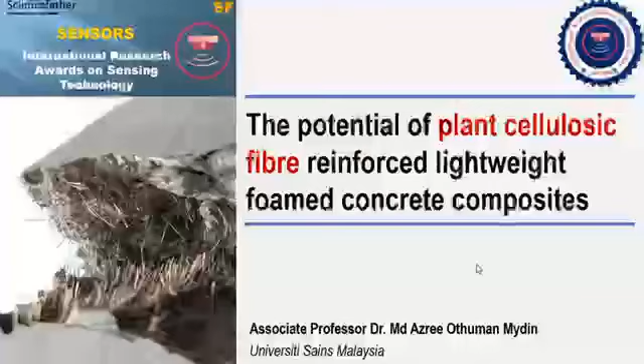My presentation, or to be more precise, a sharing session for today, will cover the following components: a little background of the study, some reviews conducted from previous research, the methodology, the main findings, discussion, and last but not least, the conclusion.

Now I would like to share a bit about the background of the construction industry all over the world. As you are aware, the construction industry consumes huge volumes of non-renewable materials. This not only causes the wastage of minerals in millions of tons, but also emissions of carbon dioxide, which pollutes the environment. In the early era, people used renewable resources to construct their homes and buildings. The use of renewable resources plays a vital role in eco-friendly infrastructure development in human society. Therefore, the construction industry is focusing on sustainable materials and techniques nowadays. The utilization of renewable resources in construction represents a major contribution to eco-friendly and sustainable development.

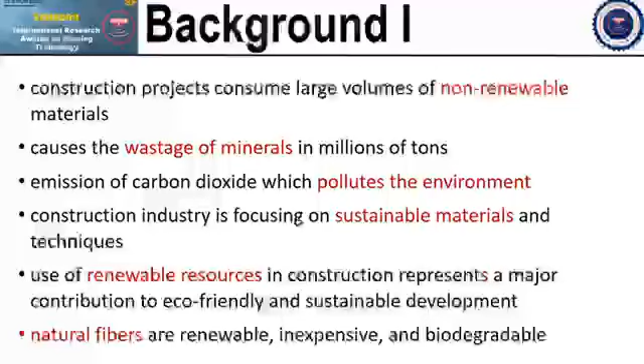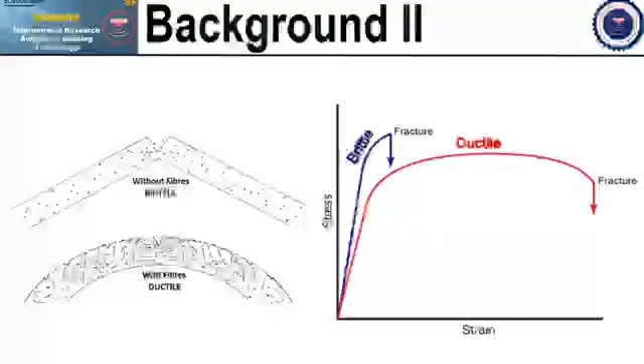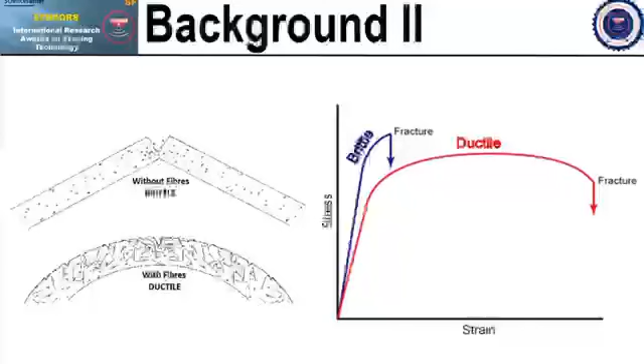As you know, concrete is brittle in nature and exhibits relatively lower tensile strength, limited ductility, and limited resistance to cracking, as you can see on the slides on your left. The micro cracks exist inside the structure of concrete and result in poor tension strength because of crack propagation with time, leading to brittle fractures.

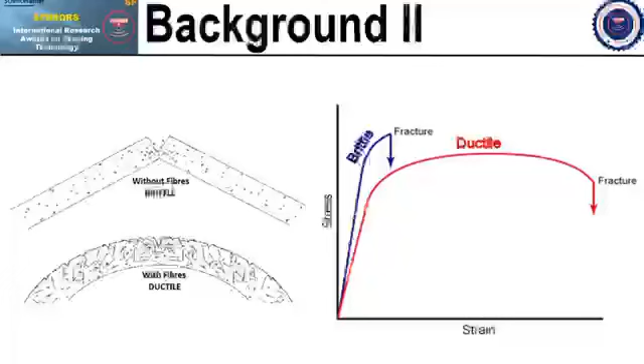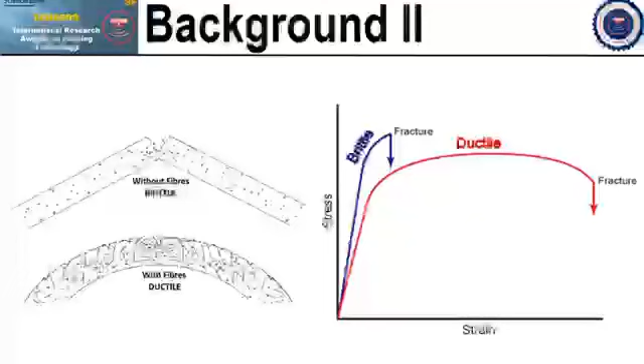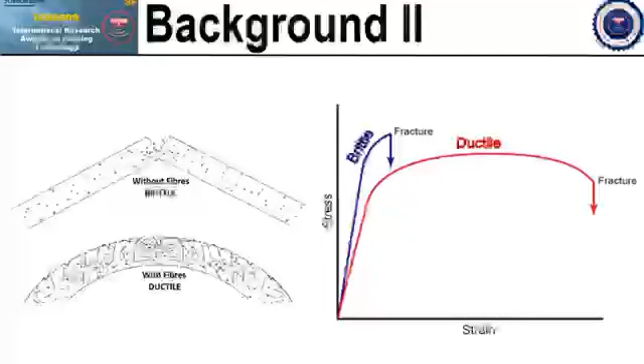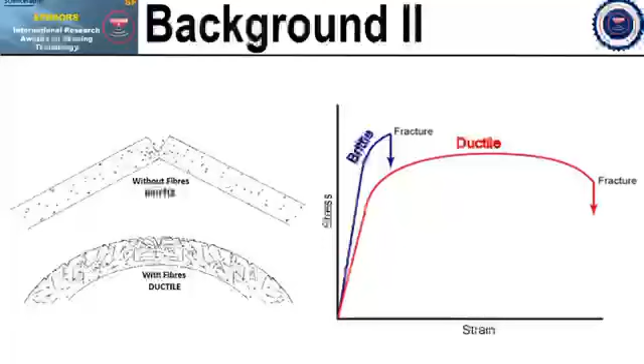In plain concrete, or normal strength concrete, and other similar brittle materials, the shrinkage during drying also causes micro cracks to happen. When a load is applied to these materials, the micro cracks start to develop, which are uniformly distributed and randomly oriented. So the introduction of uniformly distributed fibers can reduce the drying shrinkage by arresting the propagation of microcracks, and at the same time, increase the mechanical properties of concrete.

The demand for structural lightweight concrete all over the world is rising due to the significant benefits of low density concrete in terms of load bearing capacity, smaller cross sections, and an equivalent reduction in the size of the foundation. Structural lightweight concrete has noticeable advantages: a higher strength to weight ratio, excellent tensile strain capacity, and a lower coefficient of thermal expansion due to the presence of air voids.

A lightweight foam concrete, or LFC for short, is one of the most well-known types of lightweight concrete recognized and established all over the world. LFC is a cement paste in which air voids of roughly 0.1 to 1.0 mm in size are homogeneously dispersed by a proper foaming agent in either a mortar, aggregate and cement paste, or cement paste alone.

Foam concrete has high flowability, low density, excellent sound absorption capacity, and outstanding thermal performance. With proper control over the amount of foam, an extensive choice of densities can be fabricated, ranging from 500 to 1,800 kg per meter cube.

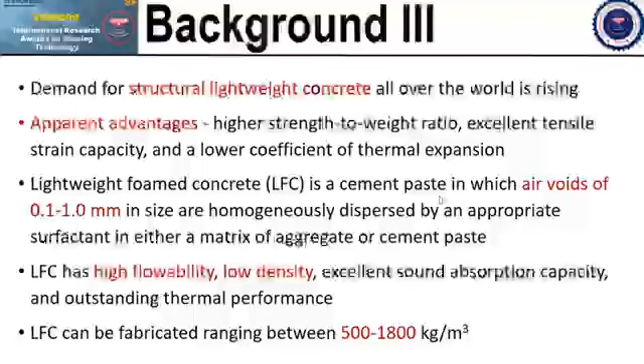Several researchers have investigated the addition of natural sustainable fibers such as kenaf, wood, bamboo, jute, coir fiber, coconut fiber, kapok, hemp, loofah, and others in concrete, and observed an improvement in mechanical properties and also a reduction in crack propagation inside the concrete.

The reported results reveal that through the addition of natural fibers, some properties may be enhanced and some may have deteriorated for sure. The addition of natural fiber up to 1% of the cement must improve the compressive properties in concrete, and sudden brittle failures are restricted with the increasing percentage of fibers.

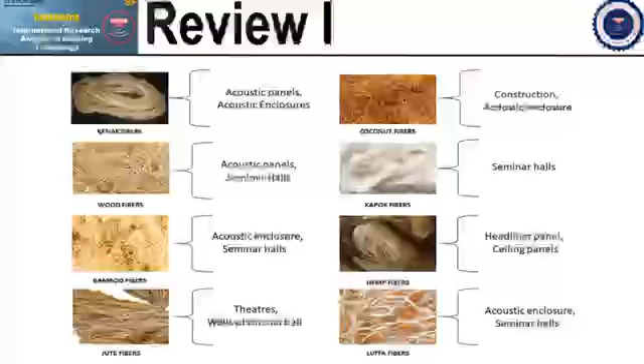Several researchers reported findings on the reinforcement of jute fibers in concrete in order to increase the compressive strength, flexural strength, and impact strength. The results revealed that the properties improved through the reinforcement of jute fibers up to a certain limit.

Next, the technique for the extraction of inert carbonized particles from bamboo and cement composite, and the effects of their addition, has been reported. The findings reveal that the flexural strength and toughness of the cement composites increased through the addition of bamboo particles.

Researchers also have worked on the reinforcement of basalt fibers in high performance concrete, and have done experimentation to test their tensile strength, Young's modulus, and compressive strength. It was observed that the compressive strength increases by increasing the volume fraction of the fibers up to 2%. Above 2% volume fraction of fiber in concrete, the strength started to decrease. By the way, basalt fiber volume percentage had no significant effect on the elastic modulus values.

Then several researchers investigated different reinforcement possibilities of coconut fibers, or coir fiber, and ropes in concrete to cast a column. The aim was to produce safe housing in earthquake-prone areas.

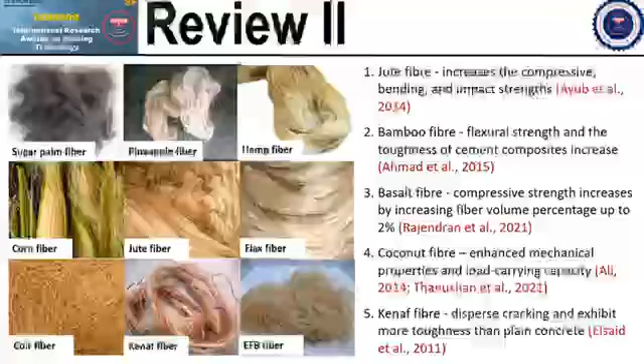Therefore, my proposed research focuses on an experimental investigation of the mechanical properties of natural origin sustainable cellulosic fiber reinforced lightweight foam concrete.

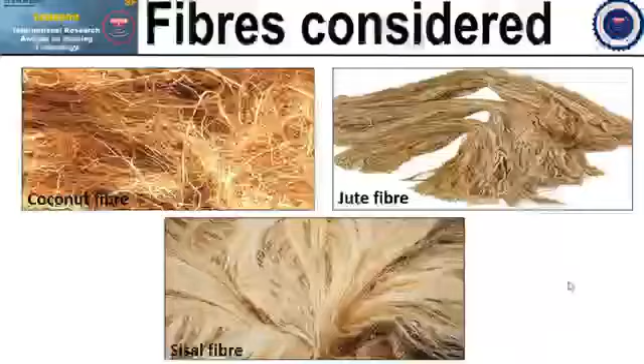The constituent materials that I used to produce the light foam concrete comprise ordinary Portland cement, or cement CEM I, conforming to BS 12 and BS 197-1.

Then I used a fine filler of fine sand conforming to BS 882, with particle sizes greater than 2.36 mm, obtained through a sieve process. A sand to cement ratio of 1 to 1.5 was used for all the mixes, while the water cement ratio was kept constant at 0.45.

Then the foaming agent used to produce the preformed foam was the commercially available synthetic foam known as Noraite PA-1. Noraite PA-1 was selected as the foaming agent in this laboratory investigation due to its ability to produce a smaller bubble size, which tends to create a stronger bubble bonding structure compared to the synthetic based surfactant.

The natural fibers used were, as I mentioned, coir fiber, jute fiber, and sisal fiber, which were freshly collected from an industrial unit after processing. As these fibers were covered by a layer of grease to prevent fungus growth and spoilage, they had to be washed thoroughly to remove the grease completely.

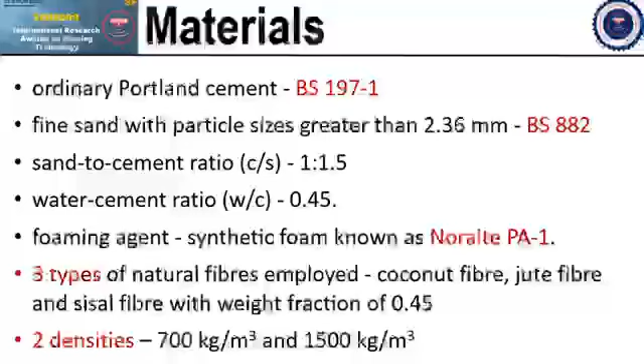Tests were carried out to investigate the mechanical properties of lightweight foam concrete with the inclusion of natural fibers such as sisal, coir, and jute fibers. These tests comprised a compression test, flexural test, and a splitting tensile strength test.

The compressive strength of the lightweight foam concrete was tested on a 100 x 100 x 100 mm cube, corresponding to BS EN 12390-3. I used three specimens which were tested on testing days of 7, 28, 56, and 180 days, and the average of three readings was recorded as the compressive strength.

For the flexural test, I used a prism of 100 x 100 x 500 mm, according to ASTM C293, with a 3-point bending test to obtain the flexural strength of the lightweight foam concrete. Then for the splitting tensile strength, I used a cylinder with a diameter of 100 mm and a height of 200 mm, according to ASTM C496. That's a little bit about the experimental setup.